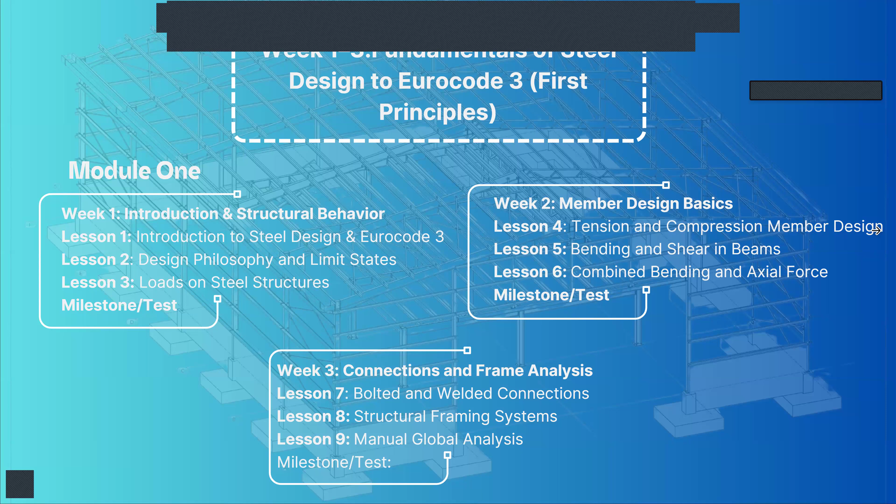Then week 3 - remember this is, quote unquote, a theory class, but it's just to build our strong foundation so you don't ask me why I'm putting 4 bolts there instead of 2 or 1. So week 3, we are going to understand different types of connections and frame analysis. This is where we discuss bolted and welded connections, then structural frame systems - frame structures, multi-story structures, and so on. Finally, we are going to do a bit of manual frame analysis so that you can even verify the software.

Then we jump into module 2. Module 2 will span from week 4 to week 5, where we are going to start the tool, or rather the software. This is where you're going to do the Tekla Structural Designer. Of course, I know most of you maybe are new to the software.

We're going to start with modeling in week 4, which will cover modeling and analysis. This is where I'm going to introduce the software to you, things to do with the user interface, shortcuts, and so on. Then we move to load application and combination, then we start structural analysis.

That's week 4. Then week 5, we start design and optimization in Tekla Structural Designer. Remember, our designs need to be safe, and again we need to check cost optimization. You can give the client a safe design, but you may have over-designed it. So we'll be striking a balance between the cost aspect and the structural integrity aspect.

So week 5 will be design optimization. Then we'll have the member design check. This is where you're going to interact with the design. We're not just accepting what the software gives us; we need to investigate and understand why the software is giving us those sections.

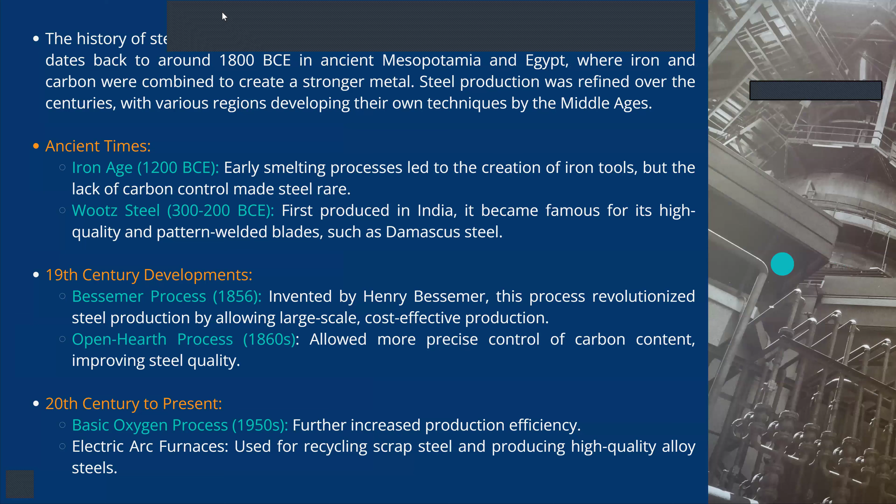So we're going to understand what steel is, the history of steel, production of steel, and so on, so that at least whenever you are doing your design, you will understand what it takes to become a steel design engineer.

So let me minimize my presentation and open up. I just want to do this for maybe 5-10 minutes and open up TSD. This is Tekla Structural Designer I'm launching. I've been using it for some time, so don't worry if I'm fast. I'm just showcasing what we are going to be modeling.

So ideally, we are going to be modeling the portal frame from scratch. We're going to first do the member sizing, what we call preliminary member sizing, where you give the sizes of those members before you run your designs. Once we do that, then we model.

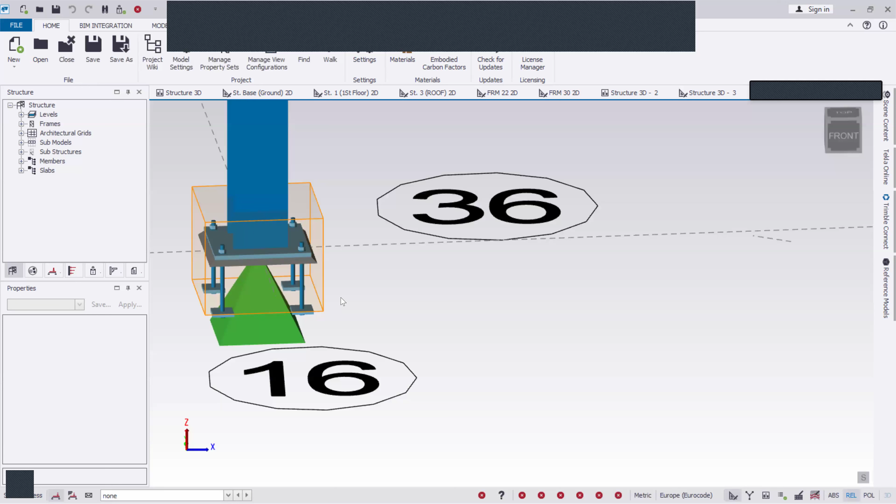So I have a few structures here I had modeled. For instance, let me open up - there's a small structure I haven't finished modeling here. We actually do something like this, but much bigger, with mezzanine and portal frame and rafters and purlins and all that. So we'll do something like this, simple.

We can actually define - you can see all these cubes you see here, those are connections. You can define that connection. I'll also showcase, though it's not part of the class, how you can export this connection with all the moments and shear force, to a software where you can design that connection.

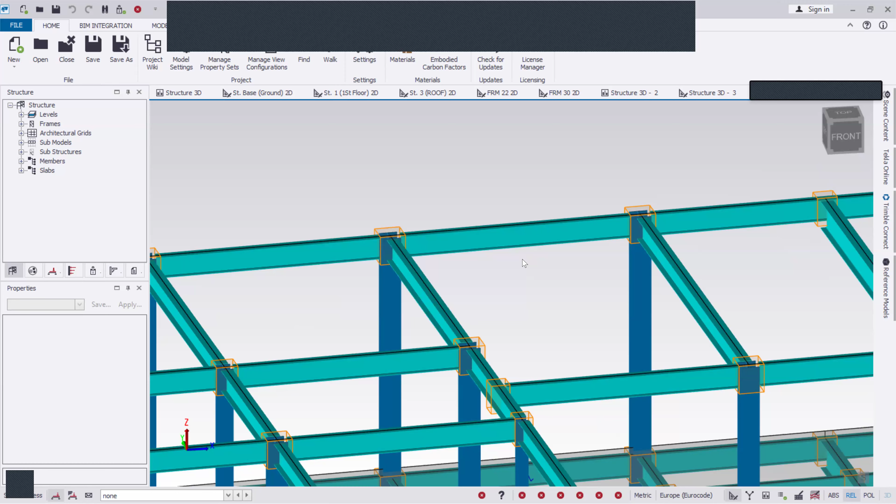So for those who have never seen Tekla Structural Designer - this is where we shall learn all this design, modeling, analysis, and all that, so that we can come up with a solid design that we then take to Tekla Structures for detailing.

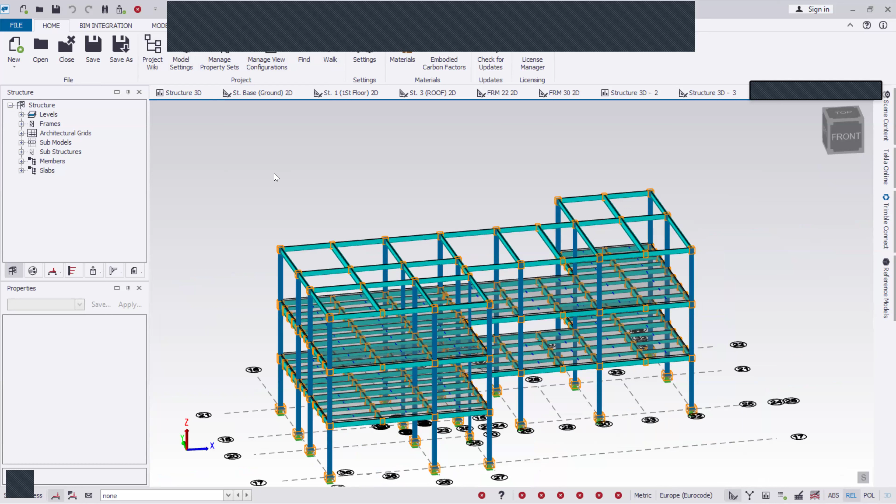Yeah, I believe I've minimized everything. Okay, at the top it's minimized, but there's something in the middle of the screen. Yes, this one in the middle. Yeah, now it's okay.

So these are what we're going to showcase and learn. You can see the user interface of the software is pretty much straightforward. You have the integration, model, edit, load, analyze, design. It's arranged in a very systematic way to provide a better workflow when you're designing, so we're going to be learning that.

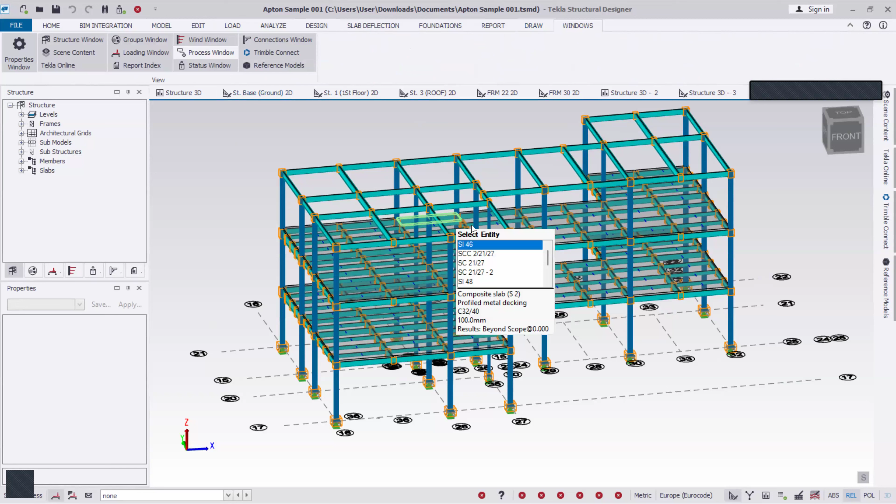Once we are done with modeling and analysis, we are going to move to Tekla Structures. Let me open up a project I'm just finishing up detailing right now. I need to finish it tonight so that tomorrow they can do fabrication. It's actually a small petrol station I'm doing somewhere.

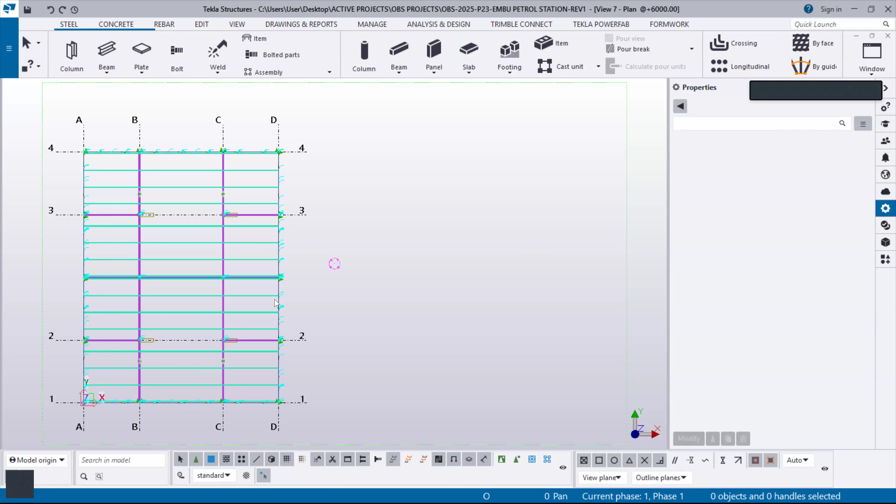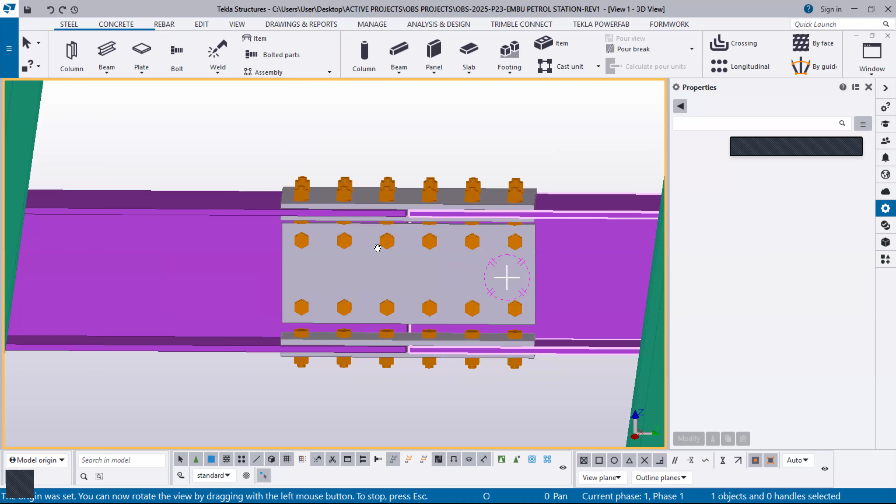You can see this project. These are the Tekla Structures where we are going to understand things like this connection. We normally call it a splice connection. We're going to understand why we're using a splice connection instead of just welding this member, because you can just weld these two beams here.

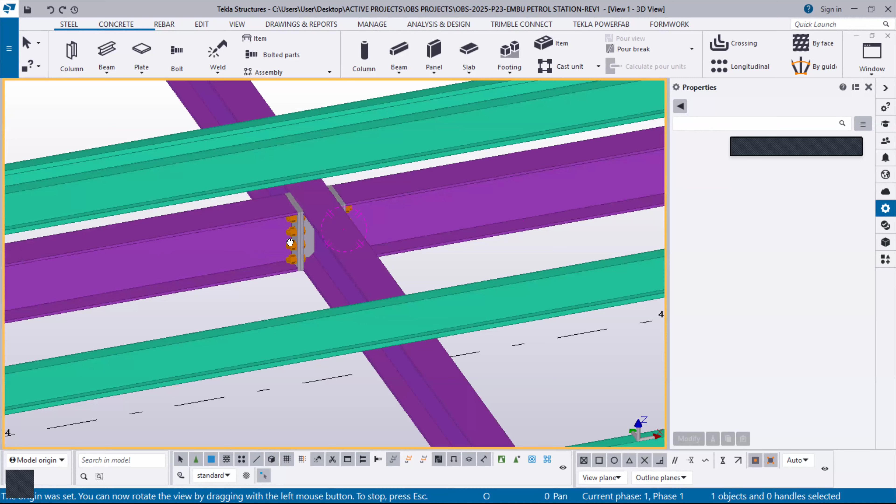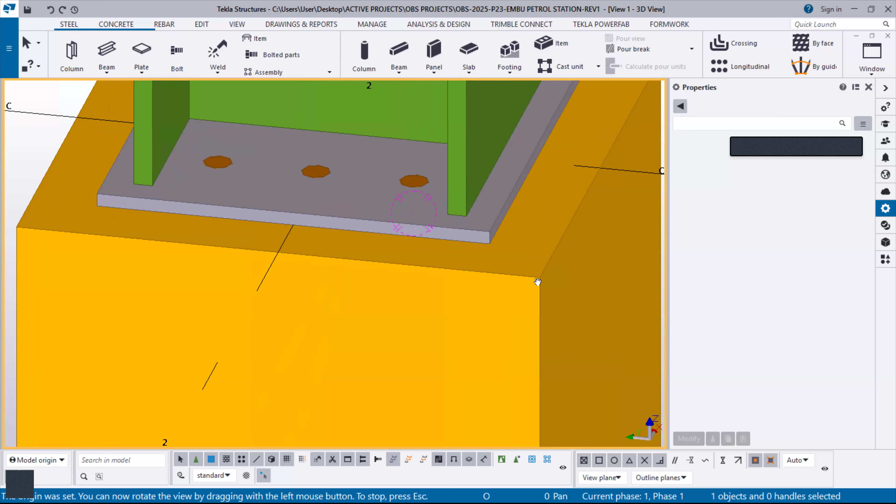We'll come to understand why we're putting a base plate that, for instance, this base plate I did here is 10 mm thick. Why are you using a base plate that is 10 mm thick, and why are we not using a base plate that is maybe 15 mm thick? We're going to understand all that.

Then finally, we are going to be able to come up with drawings. There's something called the GA drawing. Let me just open up one of the drawings I've done. Just a second, let me open it up.

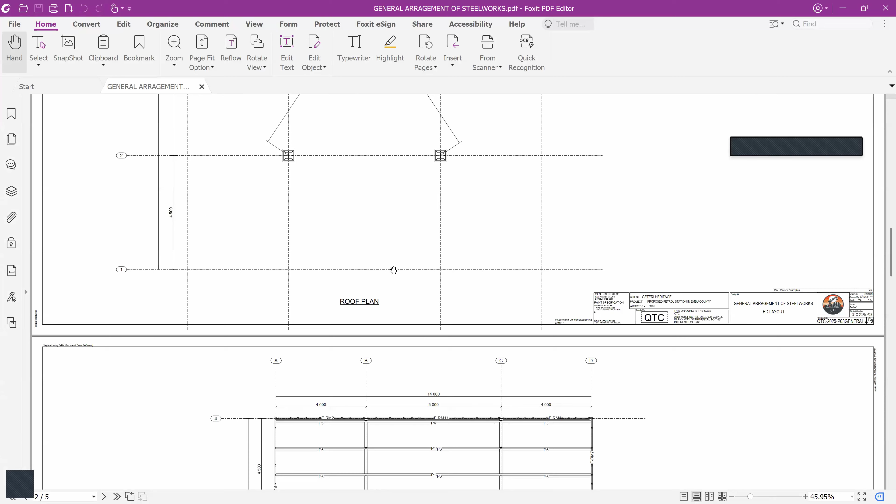We'll understand drawings, different layouts, layout drawings and so on. You can see this kind of drawing. We're going to be presenting the base plate layouts, the plan, the sections, and so on. You can see we have the sections and all this. By the end of the class, you should be able to come up with your own drawings, your own fabrication drawings and so on.

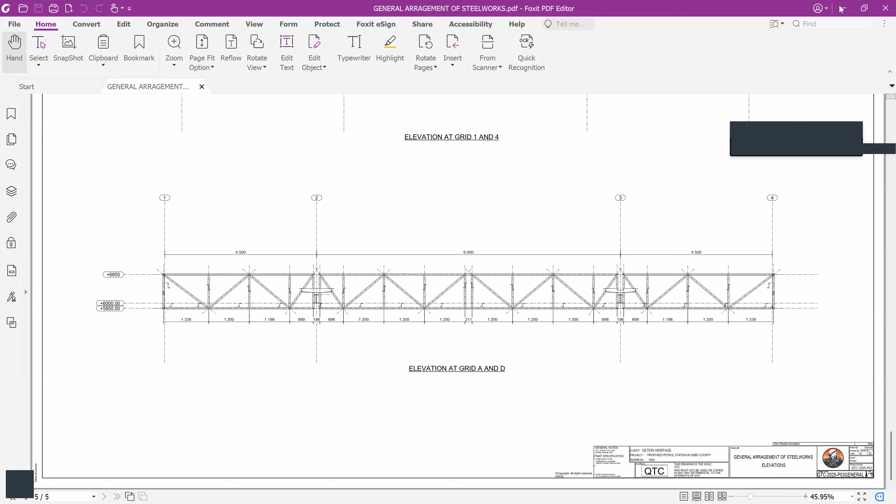So I'll pass the lead to one of my students, who was with me in the last cohort. I think he can present. He's going to present the actual model we used for that training, and the same model we are going to use for this training.

So Ahmed, are you in a position where you can share your screen? Yes, can you hear me? Yeah, we can hear you. Okay, let me share my screen, just a second, let me stop sharing mine. He's good. Please mute yourself, King Basanka.

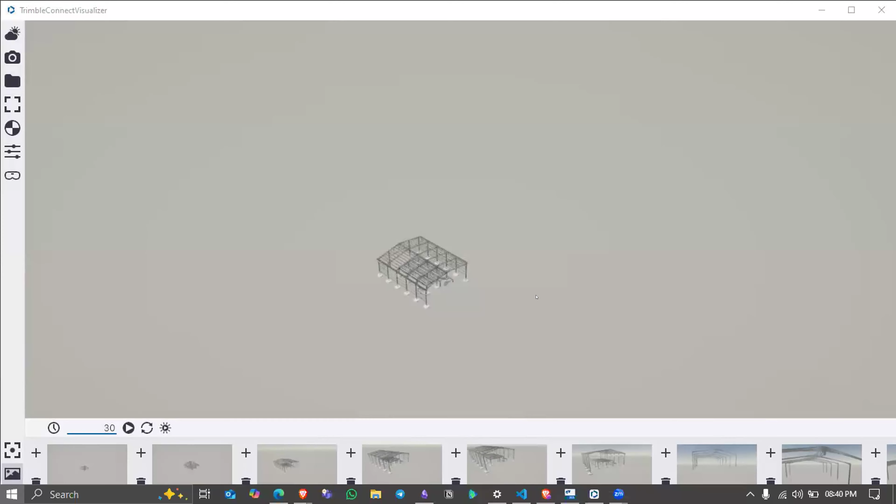Hello guys, my name is Ahmad Sabri. I am from Kenya, and it's a pleasure to have you guys with us. As our tutor mentioned, I was in the previous cohort, and this was the model that we did.

One thing I can say about my experience under Samuel's mentorship was that it was quite a game changer for me, because in school the design class is usually just the fundamentals. We're taught how to design a column, how to design a beam, compression and tension members in general. But I feel like there's a gap, specifically when it comes to holistic design and detailing.

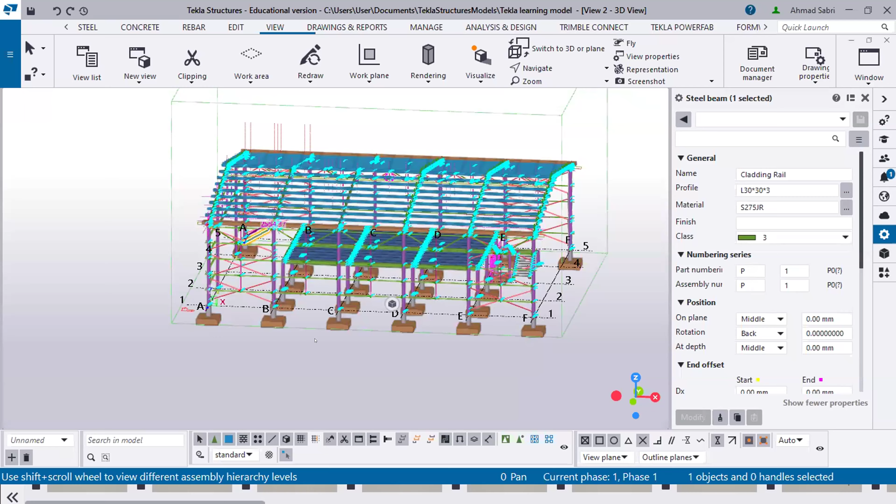After taking this course, it's the same phenomenon I had when I learned RC modeling before joining the steel design classes - it completely changes your perspective when appreciating infrastructure. There are lots of steel bridges and overpasses in Nairobi, and before the training, when I passed such steel structures, whether story buildings, overpasses or footbridges, I never really appreciated them. I just used them as our country's infrastructure. But the moment I started learning about each steel member, why they're used, and each connection - remember, for every member to member combination there is a specific connection - I started appreciating my local infrastructure even more than before.

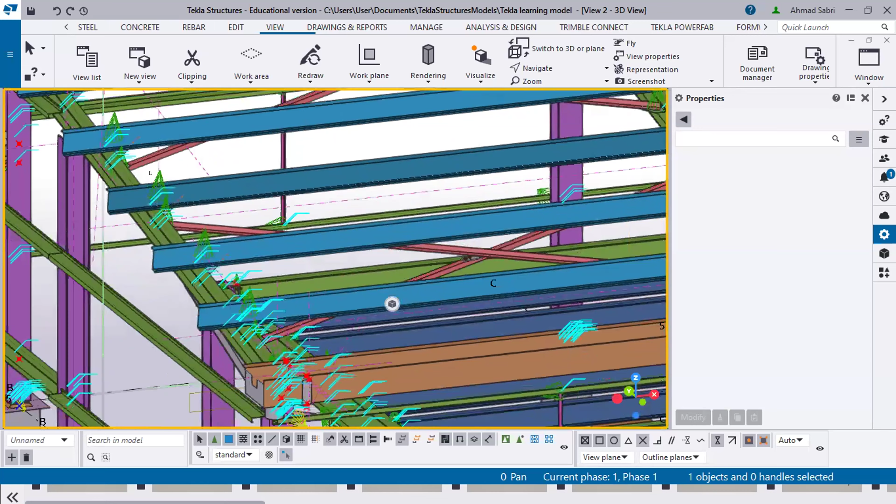What I mean is that I became obsessed with the details. Whenever I come across a steel structure like this one, I'm keen to look at how the designer or fabricator made each connection, each member. At some point I even stopped to take photos and send them to my tutor, telling them, oh, I remember this is something you taught us.

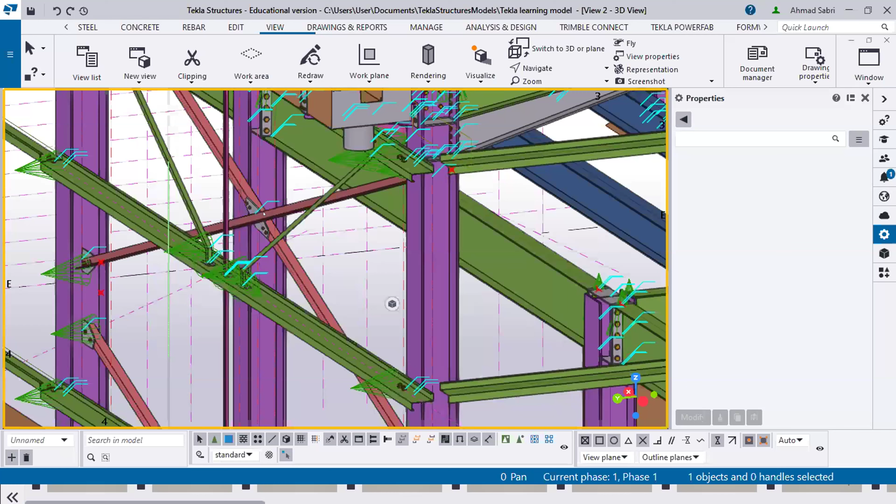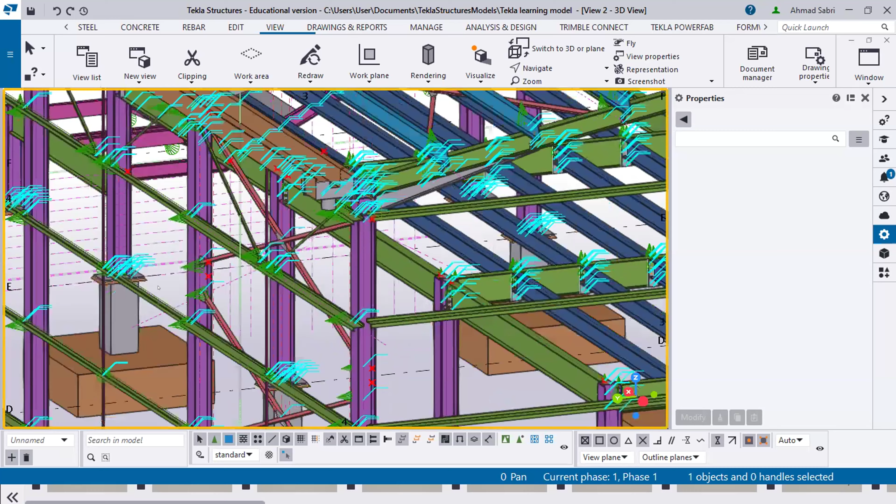I think that's really a game changer, because one thing I appreciate about structural engineering is that your classroom is not limited to online trainings and whatever you get in university. Your classroom is literally the infrastructure right around you, and this is especially the case for steel, because in concrete most of it is hidden. Most of what we design in concrete, apart from member sizes, are the reinforcements which are actually hidden.

But I came to appreciate steel more because a lot of it is exposed. When I pass by a steel structure, I'd actually learn something new. For example, here we have a fish plate, just to give you a perspective. The silver one is the fish plate, the connection between these two braces. This one is welded and this one is bolted. Another designer will have a different perspective - maybe he'll weld this and this, another designer will perhaps cut this one and still weld them.

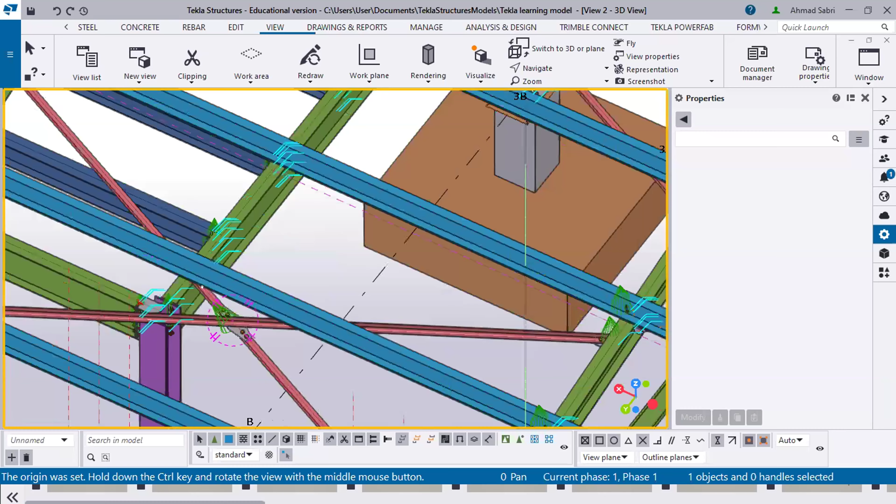So you get to learn different ideas, not just the one our mentor teaches us. You get to learn from your local infrastructure, and you get to be more keen and appreciate what is around you. That has been my experience, and I've been so obsessed with that.

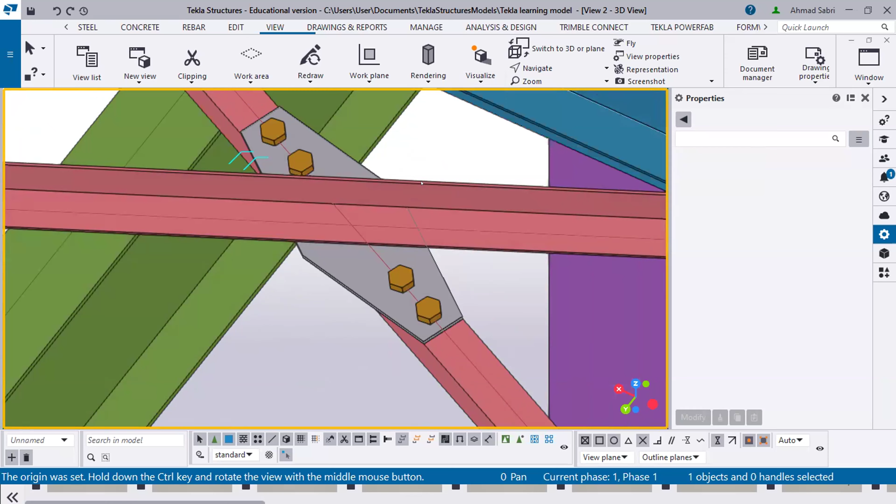This is something I created when I was playing with this tool. It's called Tekla Trimble Connect Visualizer, and it's a quick way to render your model, and it's actually very useful, especially when you want your client to see what you modeled for them, before they decide to actually fabricate and build it. Let me just play this to give you a perspective.

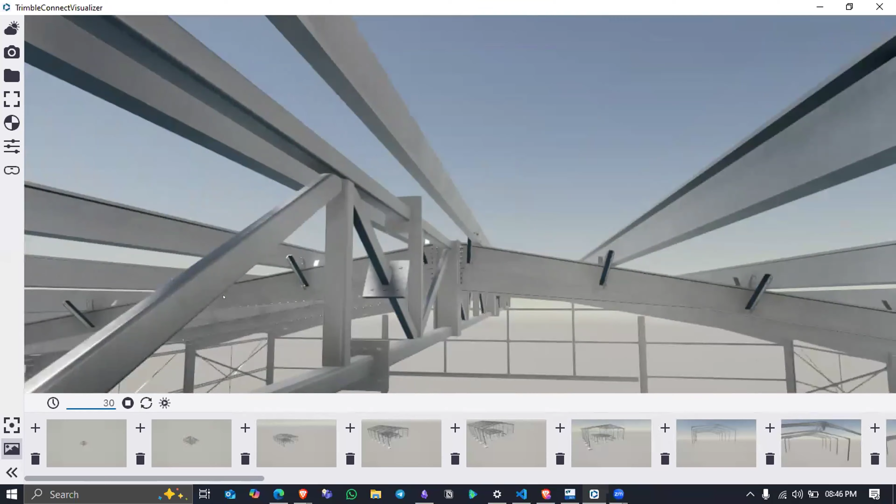The reason why I created this was just out of my obsession. After I took these classes, I became obsessed with steel structures. Whenever I pass by such a structure, I'll take photos and spend time looking at the different connections, and I think that's what made me really obsessed with this rendering tool. We're going to show you guys how to use it.

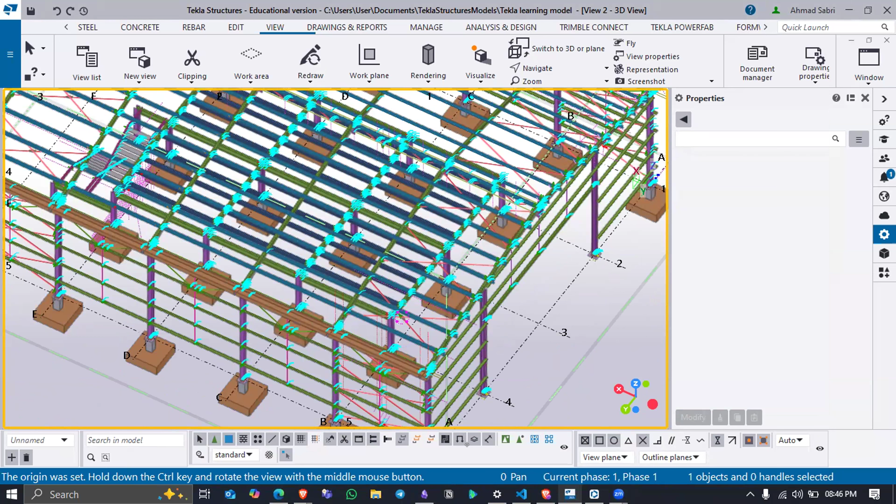One thing I can promise you is that this is a game changer. This software is a game changer, and it will completely change the way you think about steel structures.

The same thing happened to me when I learned structural concrete modeling. I used to go to site before I learned how to model and detail, and you'd see the reinforcements in the slab, and all you can tell is that this is reinforcement for the slab, this is reinforcement for the beam, but you can't really appreciate it unless you actually learn how to detail.

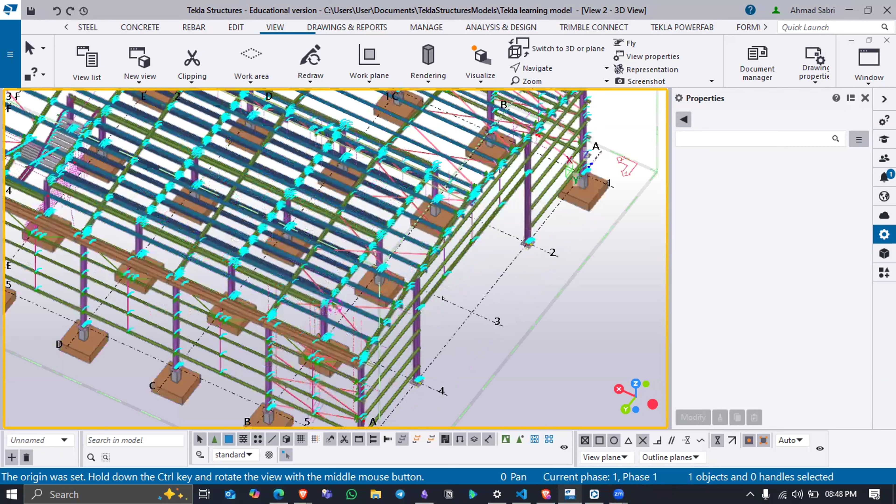After I learned how to detail, I could actually point out the mistakes being done on site. That is how it changes you. When you learn how to produce such drawings, you get to appreciate the infrastructure around you, and you can even point out mistakes. I can easily notice mistakes being done with steel structures simply because I learned how to model. I haven't even gotten to the design part yet, and if you get into the design part, your perspective will broaden even more.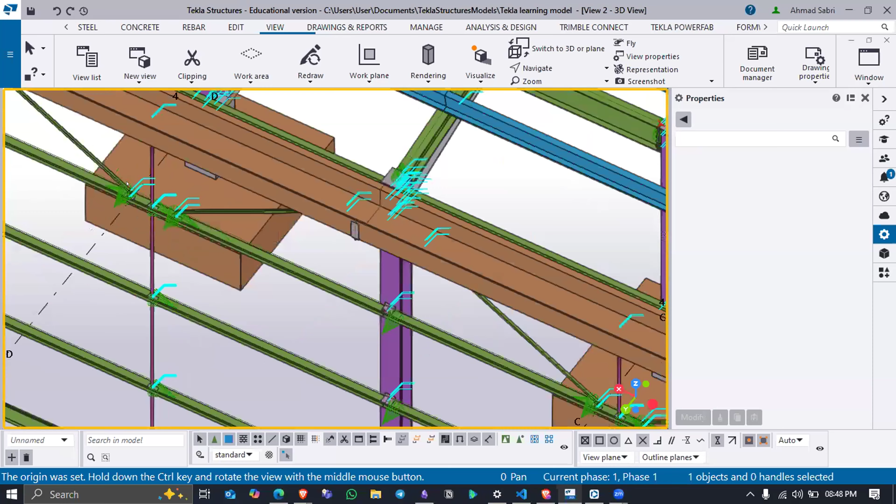We are here to support you guys. If anyone is stuck while doing your deliverables, this is one thing I can promise you: it's quite interesting, and you're going to see that with time. It might look a bit intimidating, but so long as you put in your time and effort, you're going to master it. Even for me, at first the software seemed difficult, but with time, bit by bit, baby steps, it gets easier, and you get to enjoy it. So that's all from me, and I think from here we can take in any questions.

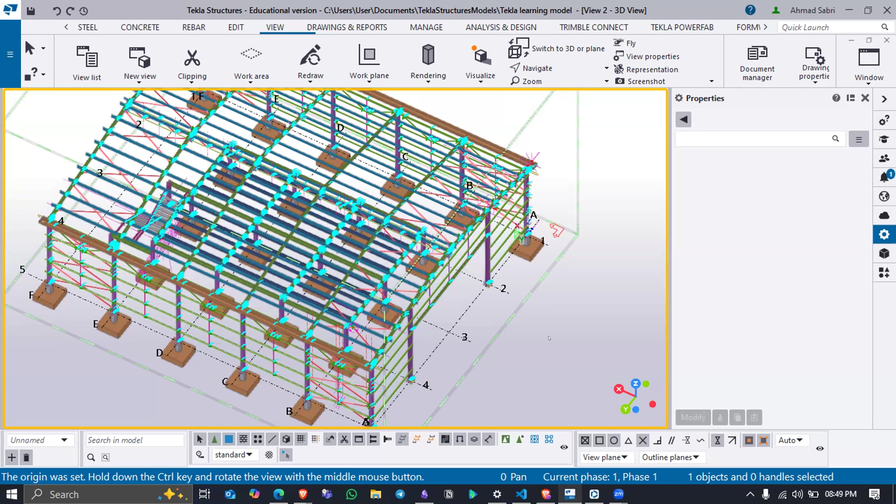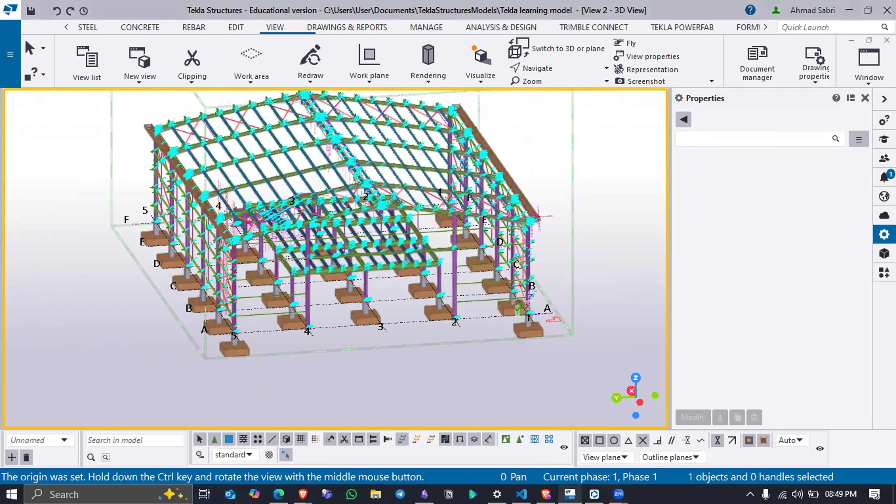Just to add to what Ahmad mentioned, for the first time you're going to have an experience where all the people who will be in Kenya, who are locally here, we're going to organize a visit to one of our big steel fabricating companies here in Kenya. You guys will get a chance to understand what goes on in the preparation of the material, the cutting, the drilling, and all those processes.

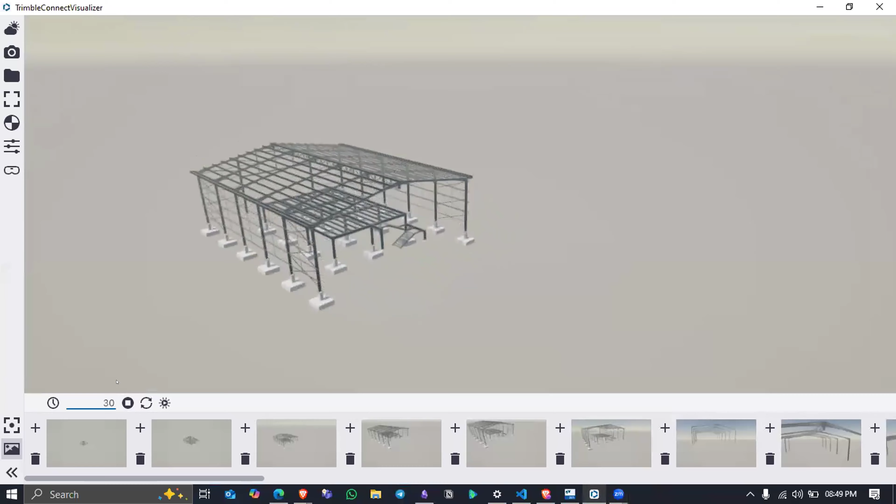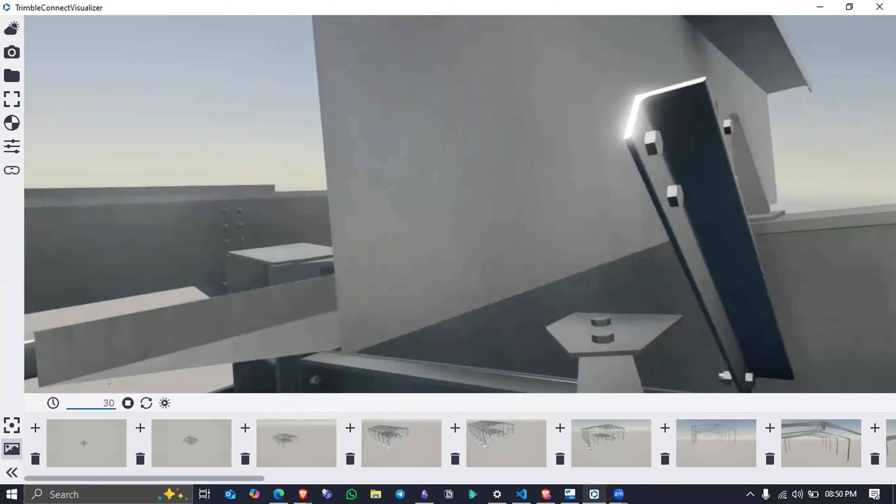You'll see the equipment they normally use, some very expensive equipment costing millions to clean the bars, clean the steel, paint, and all that. I've talked with some guys and they've really accepted this idea, so once we are done with the Steel Masterclass, we shall be able to visit them. Of course, we're going to plan it out.

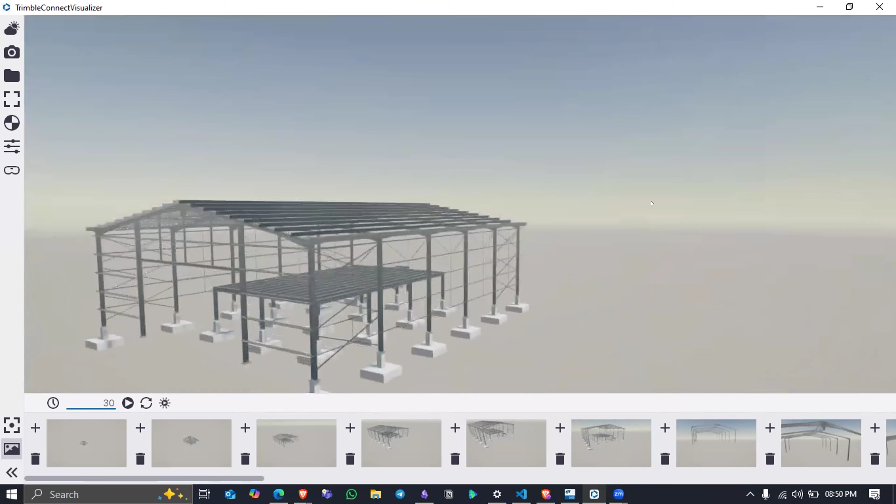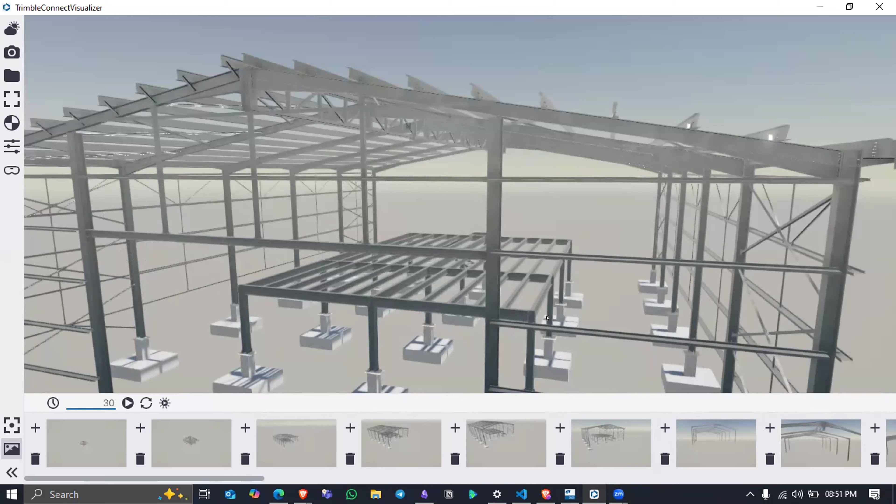So you'll be handheld. I was just looking at a comment from Emmanuel Kehinde, who's saying this is loaded and thinking 8 weeks won't be enough. It's actually something we are aware of, but what we've tried to do is provide you with quite a number of resources to read, because some of these things we might not cover fully in class, but we've tried to develop something that covers as much as possible. We'll be giving you a lot of handouts, video presentations, and recordings where I'll explain further on certain topics. So ideally, guys, the 8 weeks will cover all that.

I can see there's another question. 'Sir, will it be fine to make 3 different models in Tekla Structures: one truss, one industrial building, one 3-to-4-story building, to get to know the software in depth?'

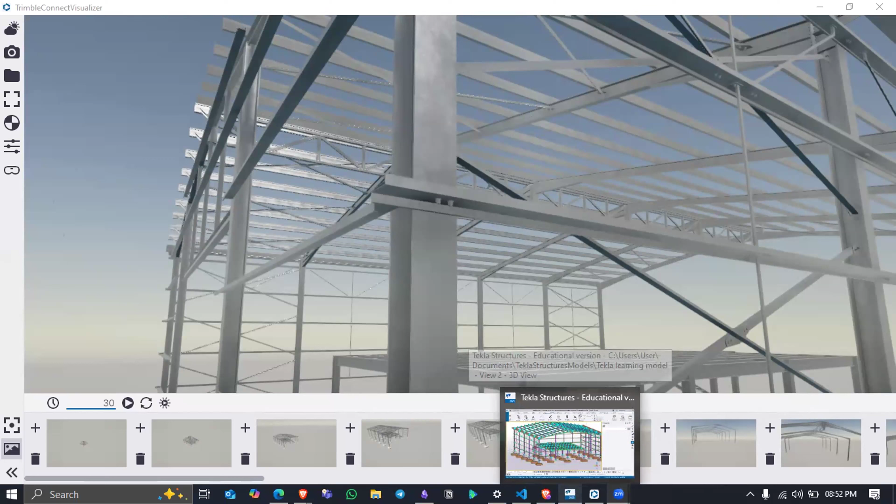Not really, I beg to differ with that, Zia. When you model a portal frame and a mezzanine structure, we would have already covered most of the tools used for the other structures you mentioned, like an industrial building or a 3-4 story building, because a multi-story structure is just like mezzanines stacked together. The only thing that changes is the sections of the columns, since you need heavier columns to support the multi-story load. So ideally, we don't need to model all of those separately, because this is just a start.

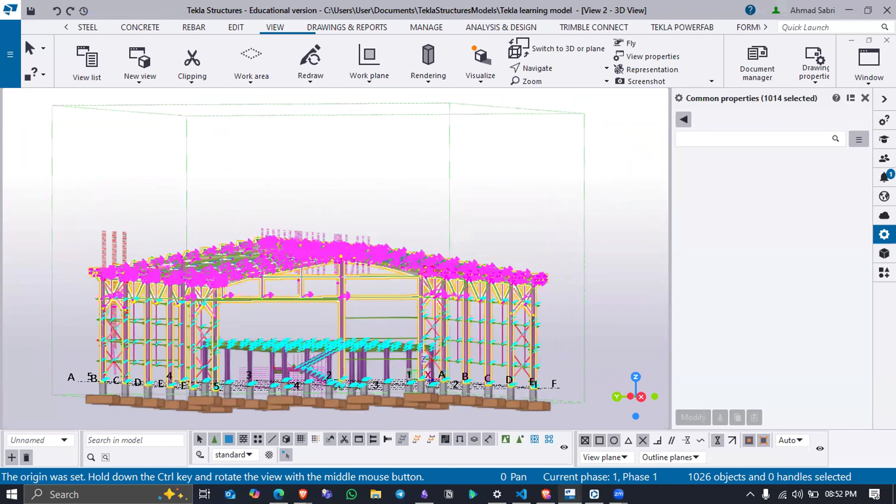We are kickstarting careers of many engineers. So ideally, we might not really model all this. We are going to have 1 model, 1 design, 1 detailing, and so on. So ideally, that's the whole idea.

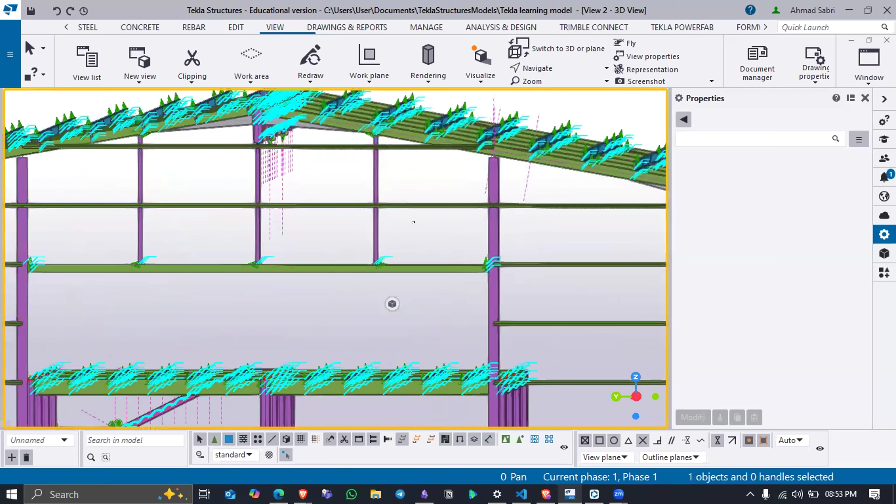And what about a composite structure, sir? So ideally, for a composite structure, what we'll do on top of a mezzanine, I'll be showing you how to do the slabs. But for a composite structure, it's more of a structure where you have both concrete and steel together. So ideally, you cannot. It's either you have encased your columns with the steel, or so on.

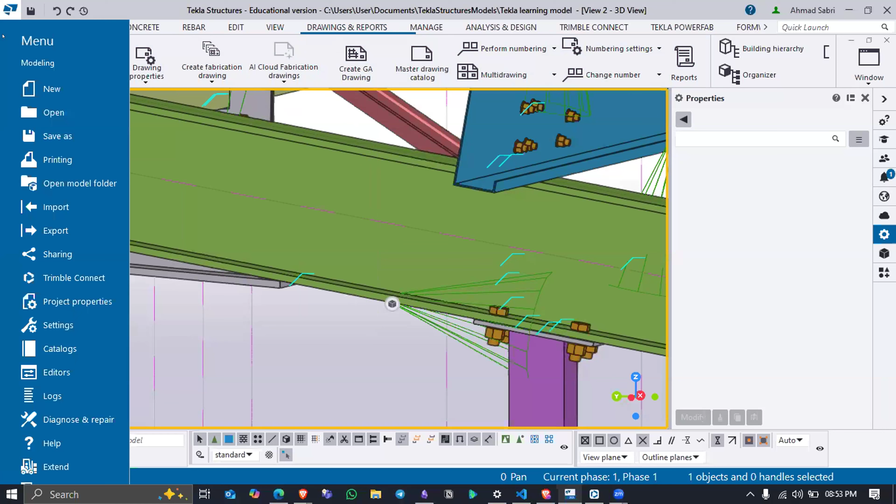Yusuf, thanks for the presentation. You're welcome. Are you going to teach how to export drawing from Tekla Structure to AutoCAD for more understanding and how to be able to work with drawings on AutoCAD? Of course, at the end of the day you need a DWG viewer where you're able to view your drawing. So ideally, I'll be showing you how to export your drawings in AutoCAD, and you can be able to edit them, explode them and edit them.

Any other questions, guys? Can you guys still see my screen? Could you confirm if you can still? Yeah, yes, it's visible.

Just to add on the answer on AutoCAD drawings, as you can see here, we have an export option where you can export in form of different kinds of files, including Trimble Connect, where you can actually host your model online.

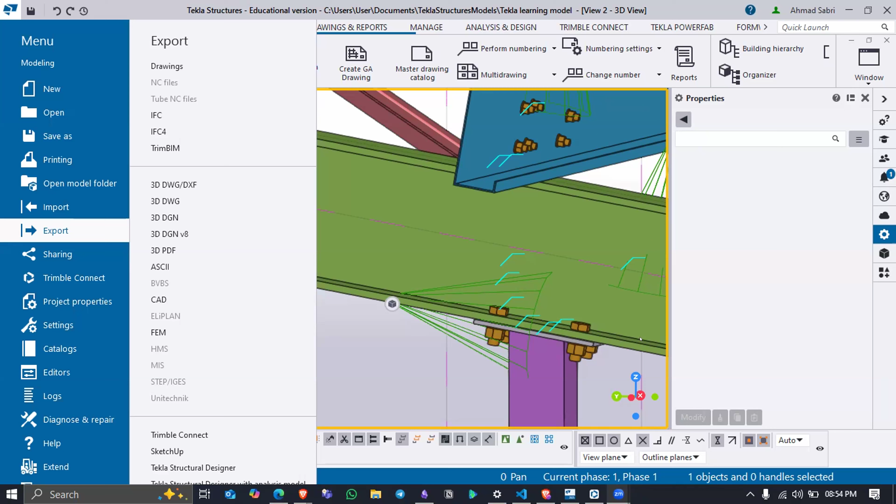And the good thing for the BIM workflow, you don't really need to model again in Tekla Structures. I'll be showing you. The only thing you need to do once you model your model in Tekla Structural Designer, you can only just import it in Tekla Structures. So we'll be learning how to link both softwares, we're going to define the sections and the properties and so on.

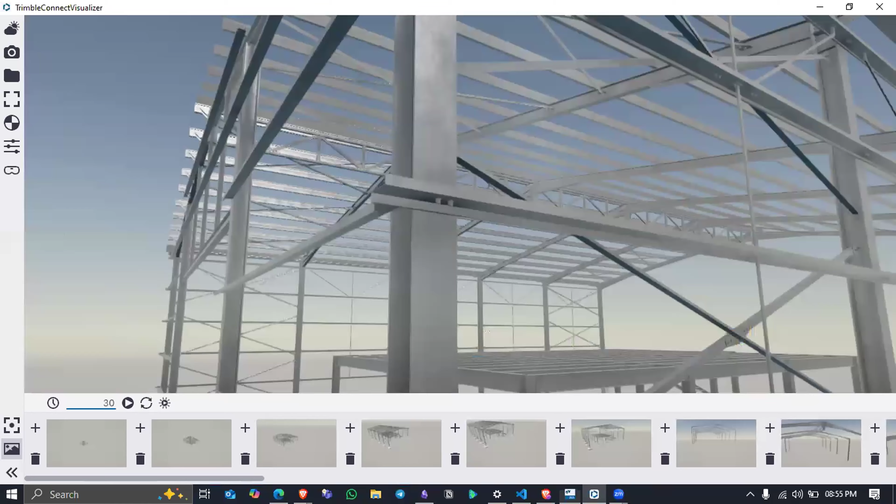Will the final design be, sir? Will it be the final design outcome of the structure that will look like at the end? Yeah, definitely. We're going to do such a kind of, because at the end of the day we are going to give the whole outcome, just the way you have seen it.

So we'll do that. To all, I think this presentation is just a pure highlight of what we can expect to learn throughout the course. For those people who want to know the most of these things, maybe you can enroll in the course.

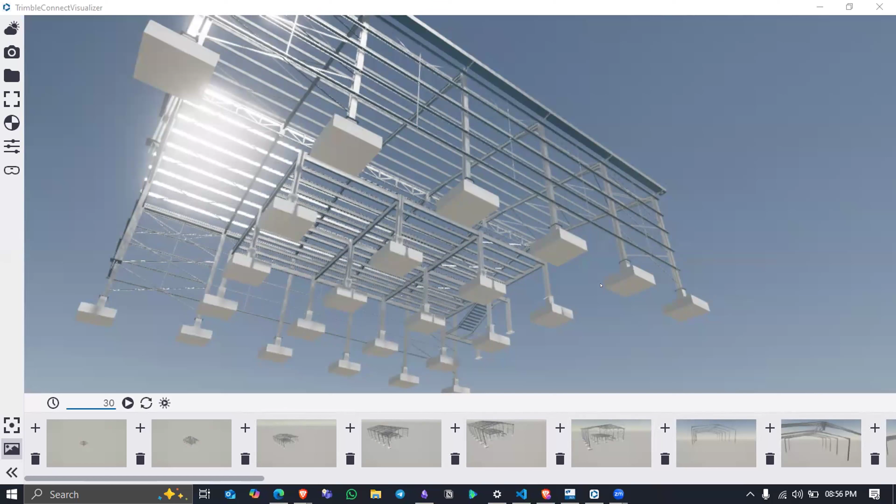I would also like to see the drawings, final outcome of this course. Will we also be able to produce material? Definitely, we'll also be able to provide a bill of materials. The difference between a bill of material and BOQ is that the BOQ has the rate aspect. So ideally, it's like we're doing the same. We'll be doing the same.

Will you provide us with slides at the end of each session? Yes, we have, not even at the end of each session. Each session has its own supporting material, so we'll be providing that as we move.

Can you let us see a sample of the final drawing, showing the assembly part? Yeah, definitely, I'll be showing you that at the end of the class. Ahmad is able to open up. These are assemblies, these are general assembly drawings, a GA.

How are we going to install the software? Of course, I'll be guiding you on how to get a student license. You'll get a student license valid for 1 year. That's the software we're going to be using for training.

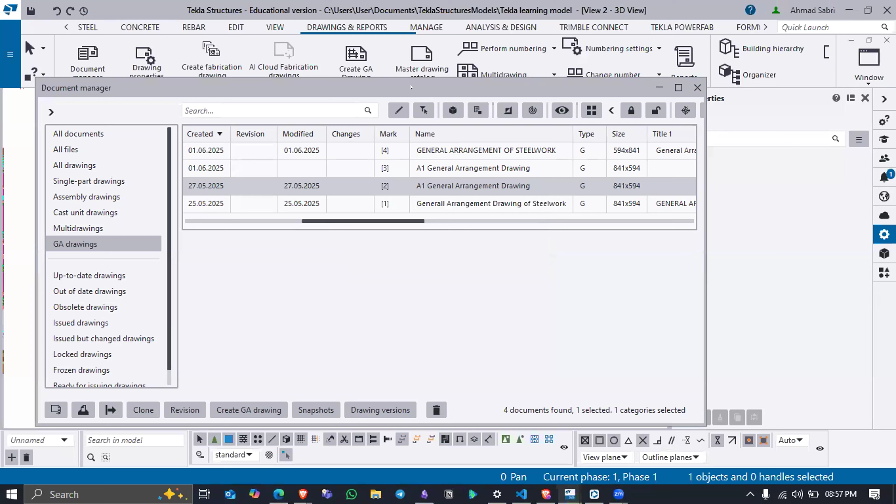Are we using Eurocode 3 and will we add Tedds to the masterclass? No, not at this point, Duncan. We're not going to add Tedds, but I'll show you how to check your design in Tekla Tedds. I'll show you how to, but we're not really going to focus so much on Tekla Tedds. What are the requirements of getting both TSD and TS installed in our devices?

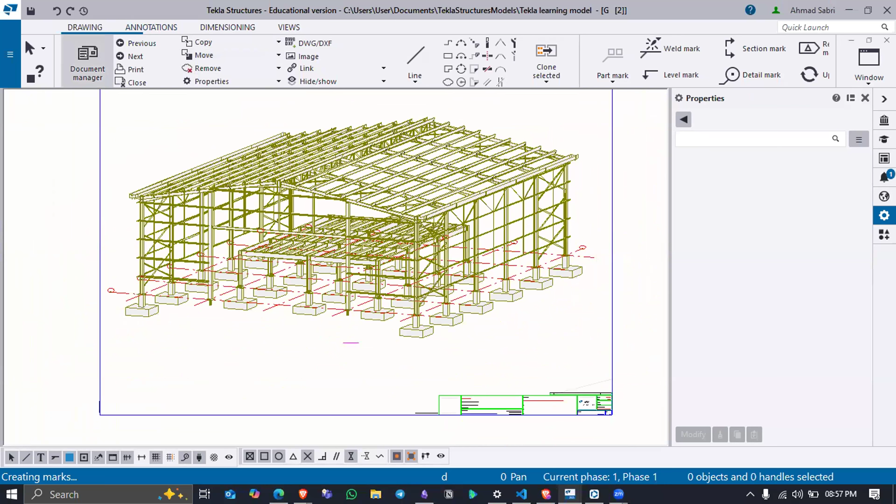Is it part of the package? Yes, it is part of the package. Brian, yeah, it's part of the package.

Thank you for the presentation. It's powerful, although I seek to understand from you, what is the difference amongst Tekla structural software?

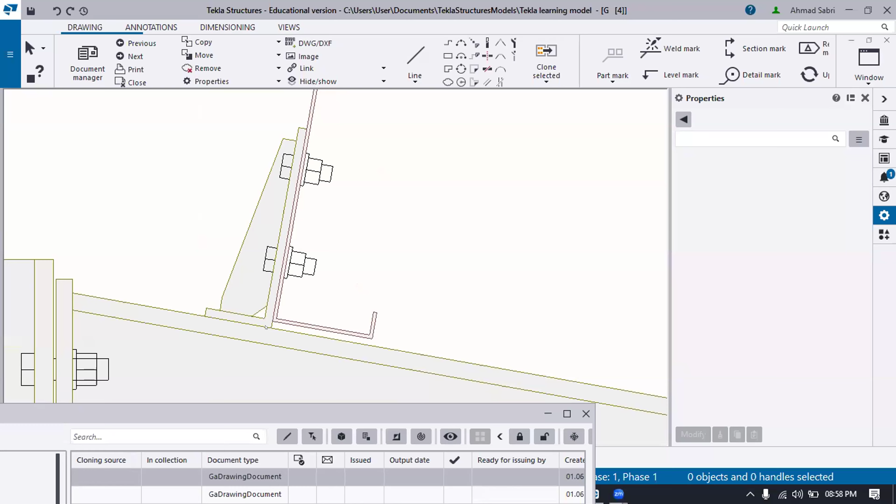These are very good questions. Most people get confused when it comes to these softwares. Ideally, Tekla Structural Designer is a software to do structure analysis and design. Tekla Structures, on the other hand, is strictly for detailing, both reinforced concrete and steel, as we shall be seeing.

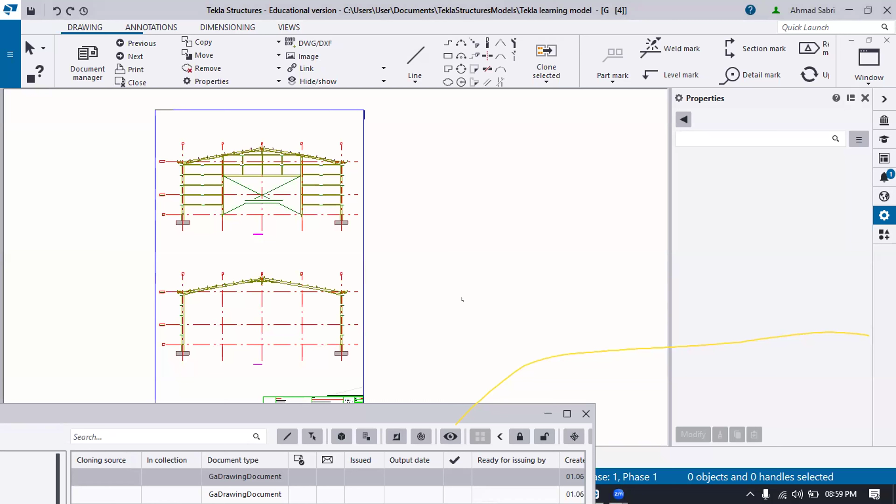The other one, Tekla Structures, is for detailing. Yes, TSD is for analysis and design. Exactly, whichever the name is. Thanks for that, correct, that's true. Any other questions?

Guys, you can see a couple of drawings Ahmad is displaying on the screen. So we're going to be doing such, we're going to be having such an instance. Any other question? Yes, the certificates are from Trimble itself.

Will we be shown how to model trusses and space trusses? Okay, it's something I can just touch on, because ideally in our structure we are going to mainly focus on portal frames. But it's something we can touch on, Brian.

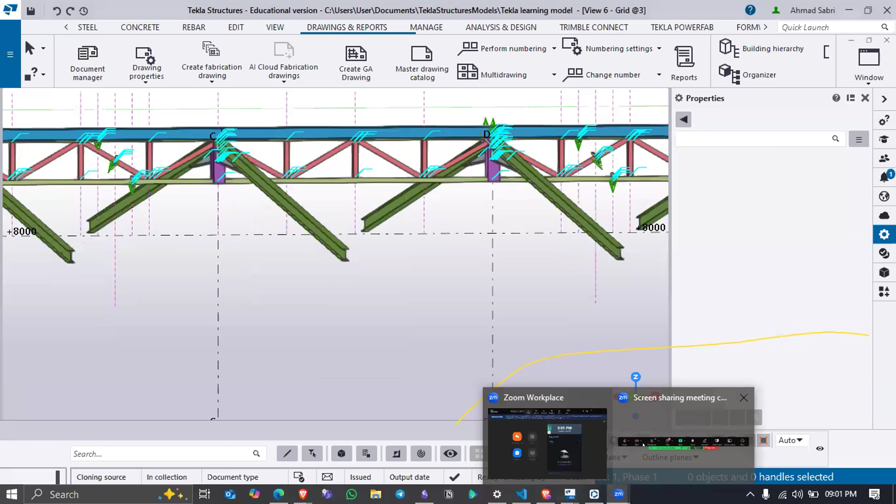I recommend before starting modeling, use Tekla software. Guide us to install the software, I got an issue in trying to install it. If you have enrolled for the class, definitely you'll get all the help to install the software, that's not a problem.

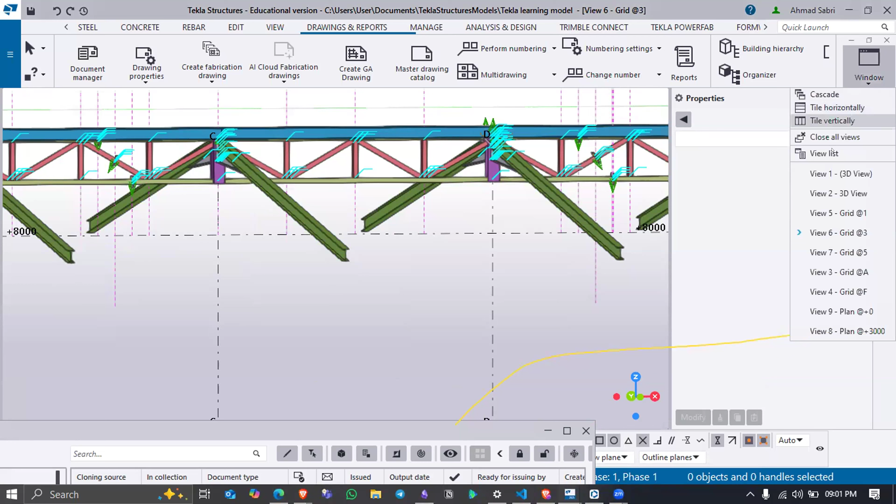I don't want a certificate, what I need is skill. It's okay, actually for us, certificate is not really the focus, because you can have the certificate and not have the skill. You're right, Emmanuel, our focus is skills, not the certificate.